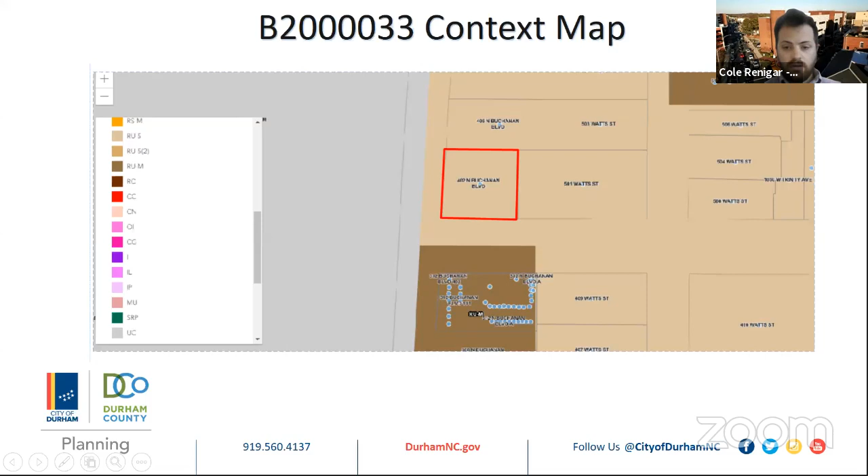Case B20, sorry, hold on a second. Case B2000033 are multiple requests for variances from the project boundary buffer requirements on the north and east sides of the parcel. The subject is located at 402 North Buchanan Boulevard. I'm sorry. The case area is highlighted in red. The site is in the urban tier, zoned residential RU5, and is within the city of Durham's jurisdiction.

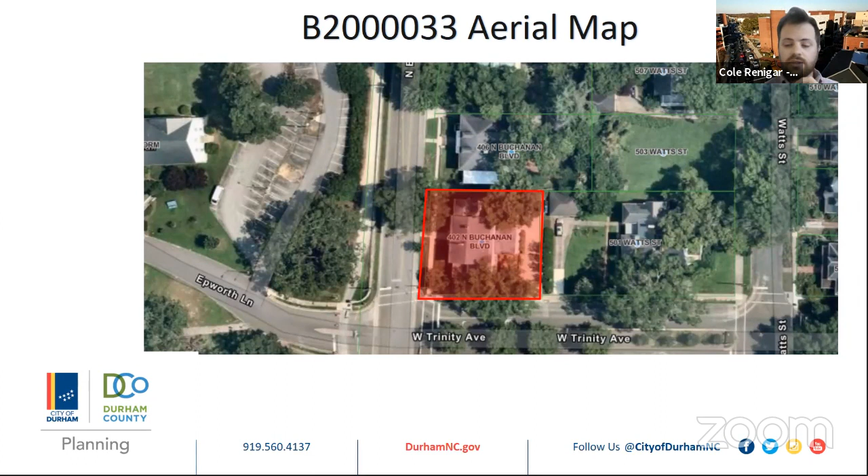The existing use is a church. Hold on 1 second, I'm sorry. Per Unified Development Ordinance UDO Section 9.4.3D, existing major specimen trees located within a required project boundary buffer shall be surveyed and protected as described in UDO Sections 8.3.5, tree protection and tree coverage, and 9.3.2, existing trees. Removal of such trees is allowed only as required to provide access to the property.

The applicant is proposing the removal of several specimen trees to make room for the new additions to the rear, the second story deck proposed to the south of the building, the new proposed driveway, and new proposed grotto. The grotto and driveway are located where the old driveway was. There is currently no project boundary buffer along the north or east side of the property.

UDO Section 9.4.3B requires a 30-foot wide 0.6 opacity buffer between residential and non-residential uses, and it should be provided. UDO Section 9.4.5.1E states that in no case shall the minimum width buffer be less than half the required width. In this situation, it would be 15 feet. The applicant is proposing a variable width buffer on the east side, ranging from a minimum of 2 feet 9 inches to a maximum of 6 feet 6 inches.

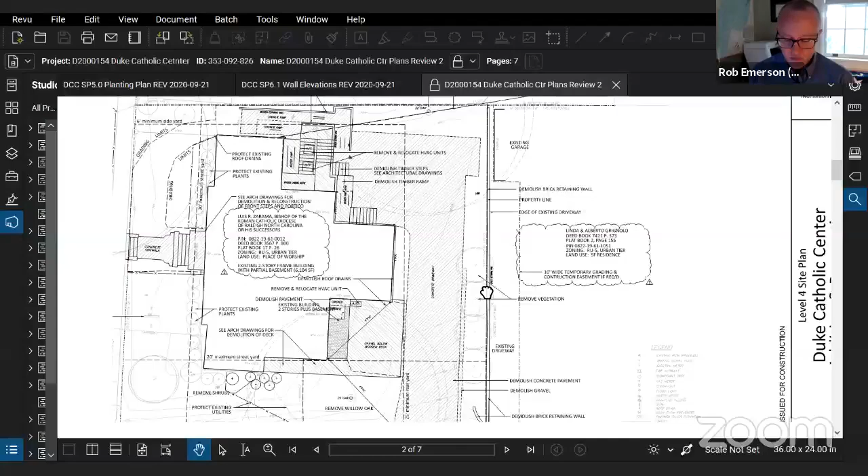Just to give you sort of a high-level overview, this project involves an existing structure that is at the northeast corner of North Buchanan and West Trinity Avenue. So we're directly across from East Campus. This building was built as a guest house for Trinity College in 1909 and was then adapted for institutional use in 1965 before being purchased from Duke by the Raleigh Diocese in 2002 for use as their student center. They did get a minor special use permit in 2002, and they have operated on this site since that time.

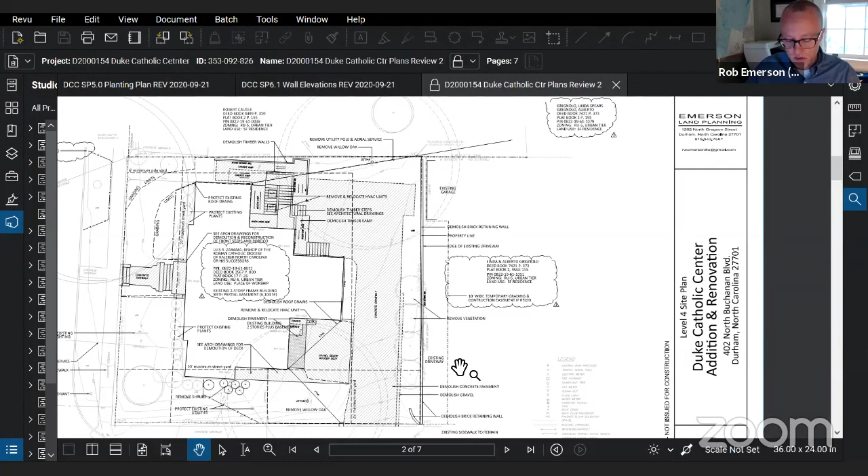What we are proposing is a one-story addition over a walkout basement on the northeast corner of the building. The addition will extend the planes of the north and east walls to a 90-degree corner. So not getting closer to the property lines than the existing building already is. We're not intruding on any required yards. We're not increasing the height of the building. The footprint of this addition is only 750 square feet, but because there's a finished basement below it, we're pushed over the 20% expansion threshold allowed by the current use permit. I understand we're talking about the variance first, but I just wanted to give you that sort of overarching view.

So our project has three primary purposes. The first one is to provide additional study space so that students can spread out through the facility. Second purpose is to expand the chapel, and in doing so, reconfigure some interior spaces that don't work very well, office spaces, bathrooms, et cetera, storage areas.

Probably the most important improvement that we're going to make is an accessibility improvement. This is an old house. There are steps that come up to the front door. There's not really much accessible about it. What we're proposing is to lower the grade behind the building approximately 30 inches. It varies from 2 feet to 30 inches. And then we'll provide a new van accessible parking space behind the building with direct access to the basement level, where we'll build a new elevator to serve all the floors. And then additionally, there would be accessible bathroom upgrades made inside.

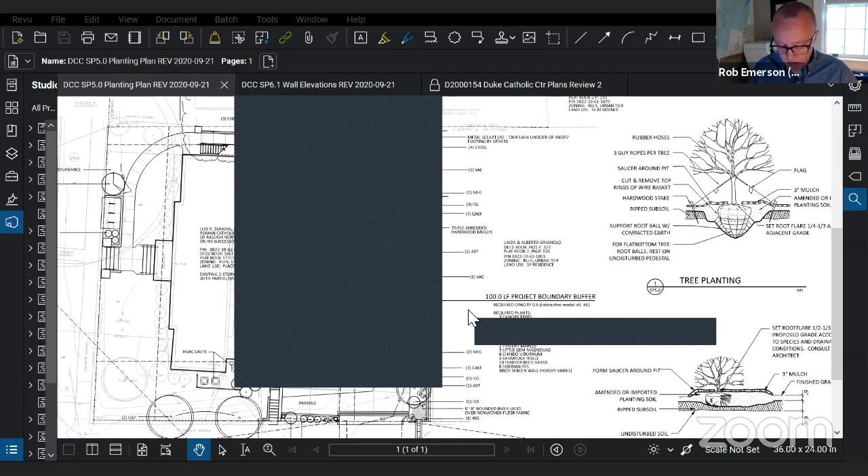We simply don't have the space to provide these buffers. These are existing homes that are more than 100 years old. They're close to each other. They're close to the property lines. The existing building is less than 10 feet from the north property line. And then additionally, there's a 32-inch diameter willow oak in the buffer. It's very close to the house. And it's simply not feasible for us to undertake the project without compromising the root zone of that tree.

So this is a unique urban condition in a historic neighborhood. It's directly across the street from East Campus. We didn't feel that suburban landscape buffers are appropriate here, and they're not possible. The house, as I said, is less than 10 feet from the north property line, and the existing driveway is less than 3 feet from the east property line. So we're certainly improving the condition versus what's out there now, although we are obviously adding on to the northeast corner of the building.

We have worked with our most immediately affected neighbors. The house to the east sits about 70 feet east of the property line. It's a huge lot. So I wouldn't say she is as directly affected as our neighbor to the north, whose house is, I believe, less than 10 feet from the property line, probably closer to 6 or 7 feet from the property line.

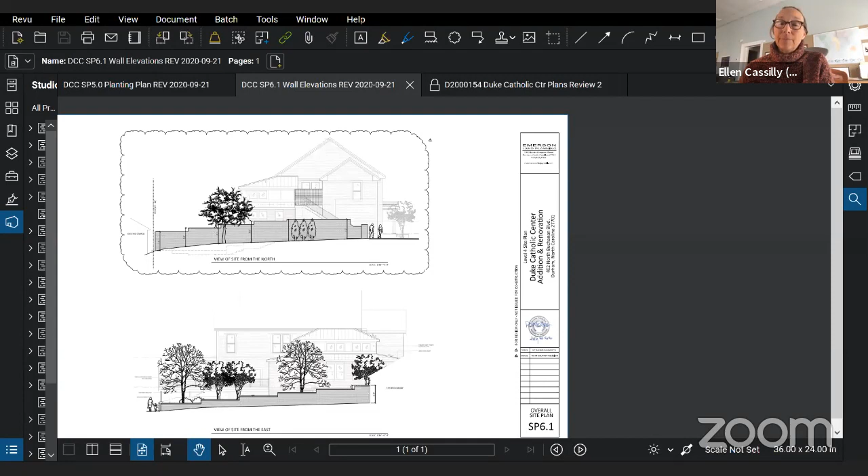Mr. Chairman, I have a question about sight lines on the east end of the property. How tall is the barrier fence wall going to be with respect to the driveway for sight line distance? Because there's a driveway right next to it, and is that going to be tall all the way to the sidewalk? I think the elevation shows it best.

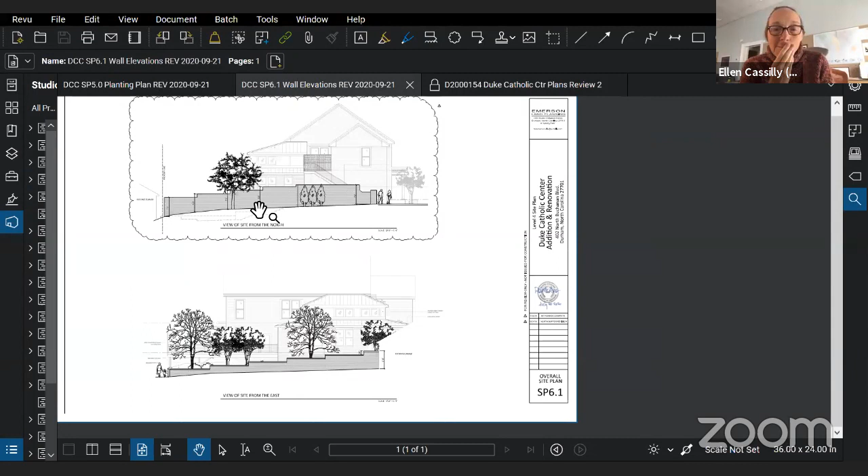Can you show me? Yeah, bottom. The people, with the little kid walking, so it'll be 3 feet high there? Yeah, that's about right. Thanks so much, Ellen. Thank you. No other questions. All right. Thank you, Mr. Lacy. Any other questions for the applicant?

Mr. Meadows, I have a question or two. The first one is, I wanted to be sure that I understood. This is an existing basement. The basement is there. There's no grading necessary for the basement. Is that accurate? Go ahead, Ellen. There is an existing basement, and one has to go down a few steps to get into the basement presently. I see.

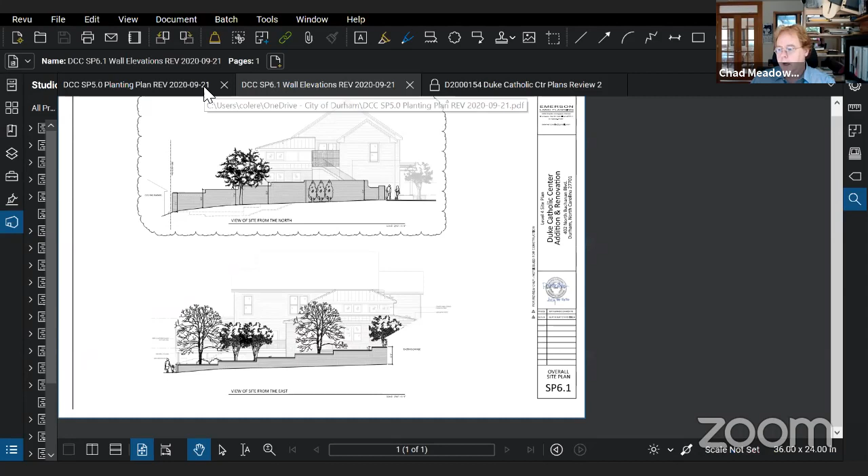So the plan is then to apply some fill so that that's an accessible access way to the elevator. Well, I wouldn't use the word fill. We're taking earth away to lower the grade to get down to the existing grade. Understood. Okay. And that grading is taking place in the location of the accessible parking space and the entrance to the elevator, and so forth. Is that right? Yes, we're lowering it obviously at the door, but to get there with proper slopes, everything needs to go down. Rob, you want to add on to that?

Yes, so the low point of our site is the southeast corner, so the bottom right-hand corner. And I guess it's frustrating not being able to point at anything. So you see where the van accessible space is? I do, yes. Just immediately north of there is where the elevator is inside the building. Is that correct, Ellen? Yes, right there. Okay. And a little bit further north, there's a door. Yeah. So to the right.

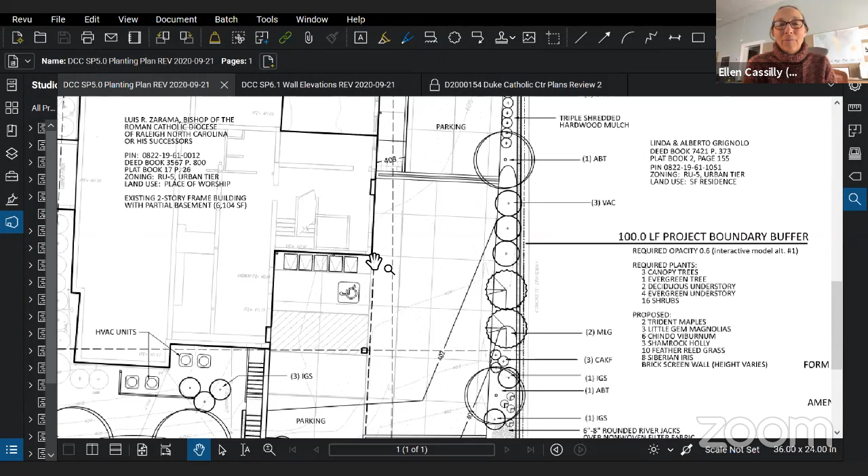To the right. There's a little notch in the back wall of the building, and that's where the door is, right there. Understood. Could you elaborate a little bit on the reasons why the 32-inch willow oak that's a specimen tree at the back, at the north lot line, how the grading in the southern portion of the lot is necessary, or how that would affect the 32-inch oak on the north property line?

Okay, so the L-shaped building addition, which forms the northeast corner of the building, will also have a basement under it. So there's a great deal of excavation happening in that part of the site for the building addition itself. And then north of there, we're bringing pedestrian circulation around the north side of the building. We're adding some bike parking out in front, and we want folks to be able to walk around the north side of the building and come to the back.

So there's a lot of work going on up there, and in the vicinity of the building addition, not only the basement addition, but the site work adjacent to it is all in a cut situation. We're matching grades essentially at the northwest corner of the building, and then we start digging our way down along the north side. So really because the northeast corner of the site is kind of the high point in the back half of the site, that's where we're doing most of the excavation.

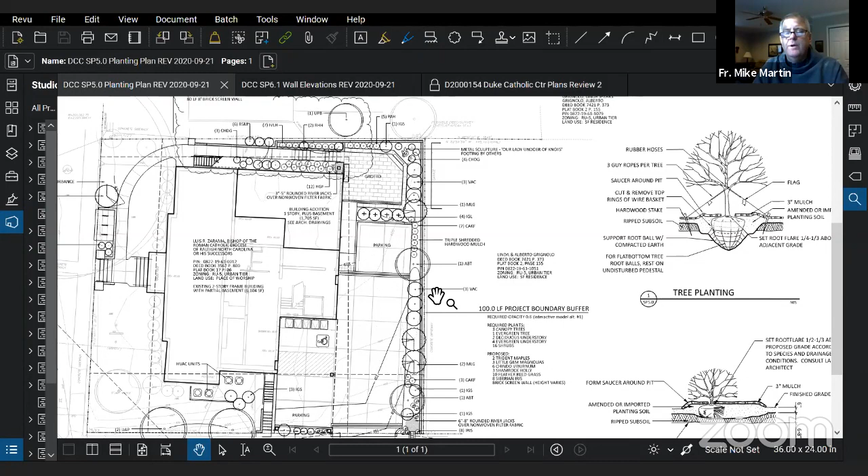So it has to come down to the rest of the grade as well. So even if we put the addition on without disturbing the root ball, which I think would be hard, and the grotto would stay at the same current elevation, then it would be in a corner of the property that we'd have to reach with either stairs or a massive ramp, so that's where we run into some problems with accessibility as well. And we do have a small ramp just to raise it up a little bit. Right, exactly.

No more questions. Thank you. Any other questions for the applicant?

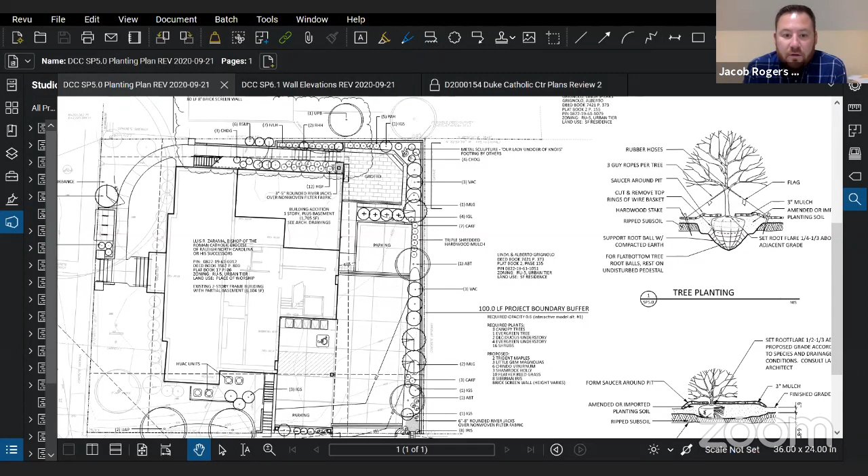All right. Cole, will you stop sharing the screen so I can see folks? Thank you. All right, well then let's have some discussion then, if there's no questions. Thoughts on this application? DeLacy? Hold on. First of all, I've got to make sure there is no opposition. Is there any opposition to this?

Mr. Rogers, I would like to speak in favor of the proposal. Go ahead. Good morning. I'm Gordon Caudle. Thank you for the opportunity to speak to you this morning. I live at 406 North Buchanan Boulevard, which shares the northern property line of 402 North Buchanan. I've been the owner of this property since 2001. I am in support of the revised changes that have been submitted, I guess, yesterday.

The applicants and their landscape architects have been very accommodating in creating what I think we will both agree is a suitable barrier between our properties, and also agreeing to replace the specimen tree that is going to be taken down and putting a specimen tree on my property. It's too bad to take down that tree, but I certainly understand the design difficulties, and it would probably die, I think, anyway. So looking forward to a new tree coming in.

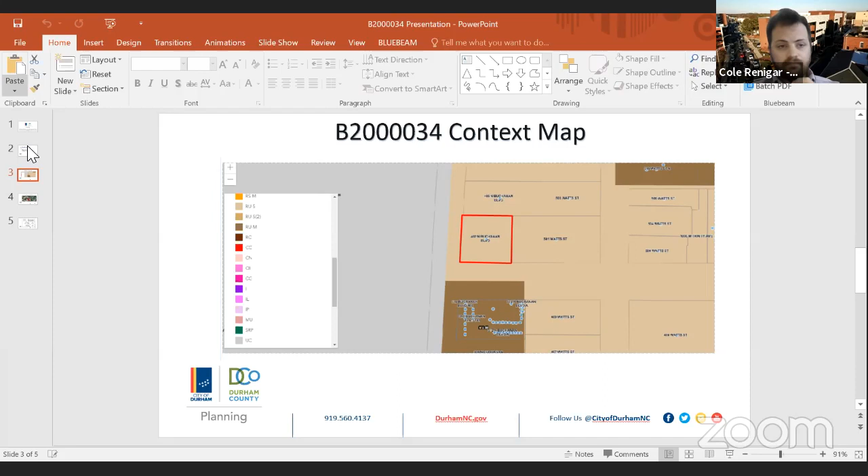Sorry. The case area is highlighted in red, and the zoning district is RU-5(2). The existing use is a church and can be seen here. The applicant, on behalf of the property owner, the Roman Catholic Diocese of Raleigh, proposes a 1,700 square foot, one-story on basement rear addition to the building located at 402 North Buchanan Boulevard. This project is on a 0.24 acre site that is currently used as a place of worship.

An expansion of more than 20% of what was originally approved for the MSUP, allowing a place of worship in a residential zoning district, shall require a new MSUP for the expansion per Unified Development Ordinance Section 5.3.3J1. A site plan case, D20-00154, is currently under review for this project and is included as an attachment to the application. See attachment 4, site plan.

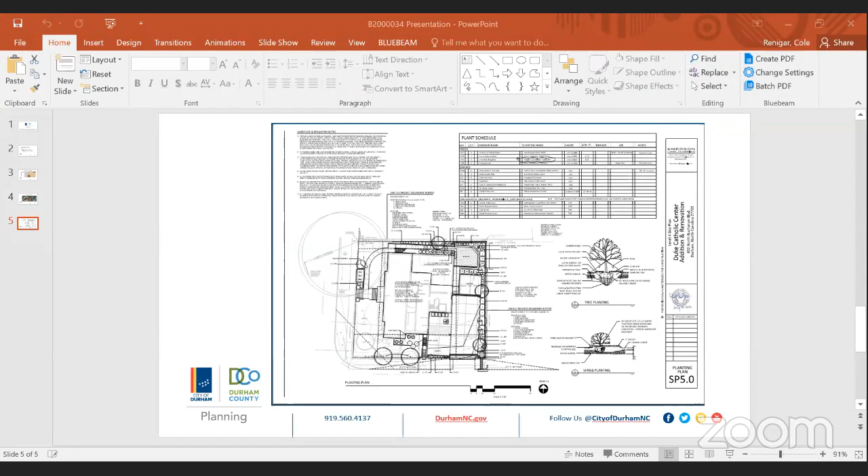All right. Susan, did you clarify the seating for this case? Yes. Okay. I just saw that Ian has joined us. Mr. Kipp. Okay. Yes. Okay, just make sure. Do you want me to verify that again? Yeah, I don't remember it. Yes. So the seating for this case is Mr. Kipp, Ms. DeLacy, Mr. Meadows, Mr. Rogers, Mr. Retchless, Ms. Wymore, and Ms. Jeter. Thank you. All right.

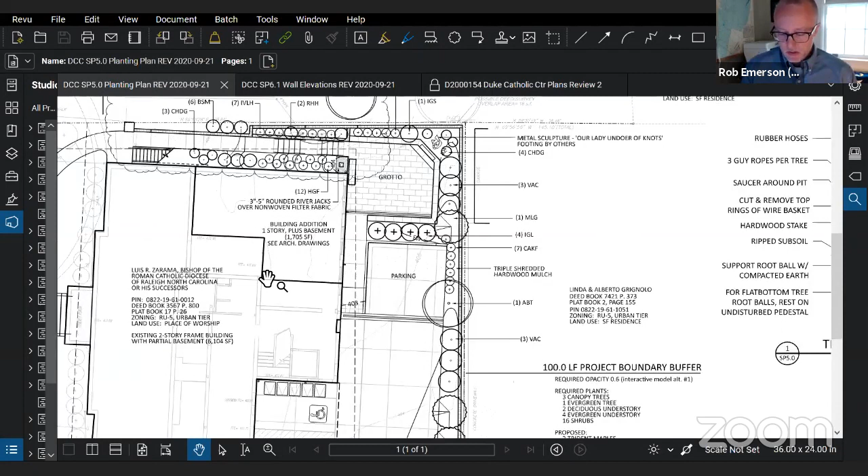Would the applicant come forward again? Hello, I'm still here. Rob Emerson with Emerson Land Planning. Again, I would ask, as Cole did, that the staff report and all our materials are made part of the public record. Thank you, sir.

Again, we're here. This is not a new use. This is a use that's occupied this site since the special use permit was originally granted in December of 2002. We've occupied this site for almost 20 years without any known problems with our neighbors. The proposed addition is just one story over a basement with a footprint of only 750 square feet. So although the floor area is being expanded by 29%, putting us over that magical 20% threshold, half of that new floor area is in the basement.

The addition is located to the rear of the building and is defined by extending the planes of the existing north and east walls to a 90-degree corner. So the addition is not any closer to the property lines than the existing building. It will not encroach on any required yards and will not increase the building height.

Traffic impacts of this addition are minimal, mostly because of the nature of who's using this facility. These are students, so they're walking from East Campus or they're taking transit to East Campus and walking to the site largely. Our parking requirement is driven by the size of the small chapel that's in the building. And part of the interior renovations involves increasing that chapel. So we're now required to provide 10 off-street parking spaces.

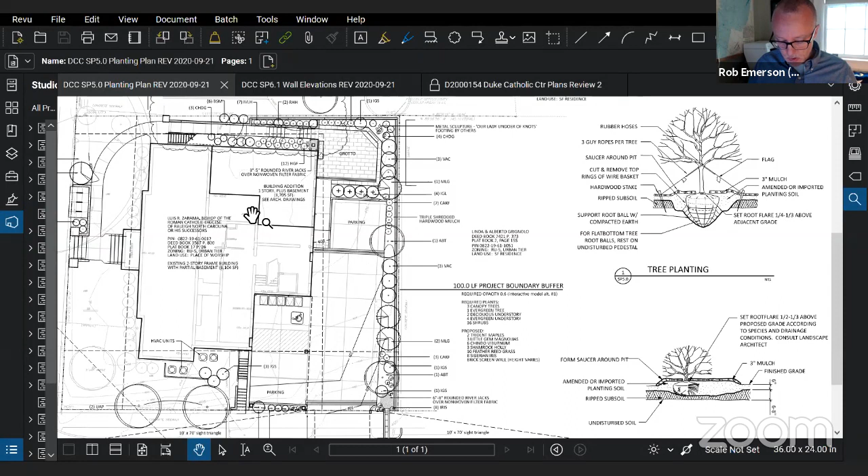We're providing 5 of those on site, including our van accessible space. And the other 5 are borrowed from Duke. We have an agreement with Duke University for 5 spaces across Buchanan Boulevard near the Epworth building. I think that's all I have. I won't read the findings to you, but I am happy to address any questions or concerns that you may have. Any questions for Mr. Emerson?

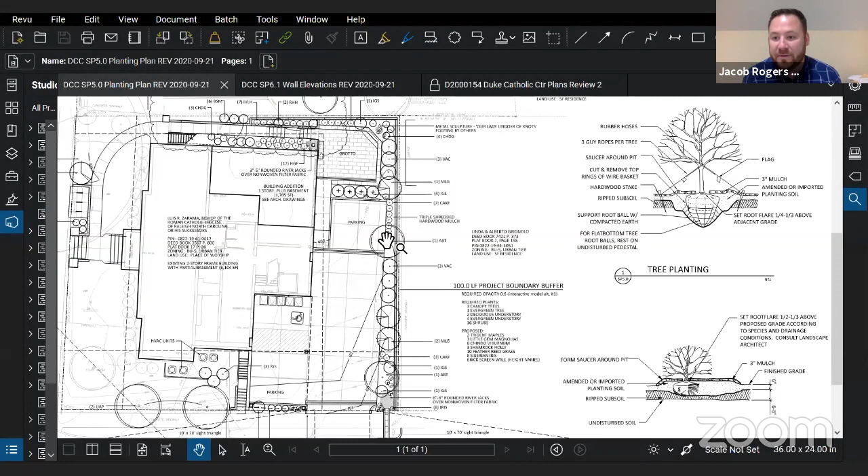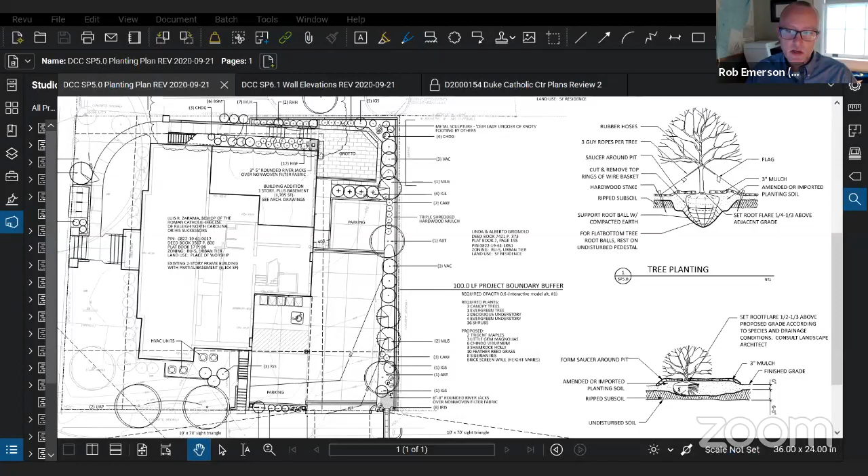Sure. I don't foresee an increase in students. It will just be that they're not on top of one another. That's the real issue, is that the same number of students are pretty much going to be coming and accessing the, I could show you pictures of when we're in our current chapel. I don't know if you know anything about Catholic Mass, but for communion, we have to have some of the students walk into another room just so we can get people moving around.

The other is the study that's going to be sort of the great room in the addition. Currently what students are doing is they set up plastic tables and chairs wherever they can find some space. And we just would like to create a more accommodating study space that will benefit them. So it's not going to increase traffic at all, but rather just allow for the students that are already there to have a space that's nice. And did you have any traffic study or anything for this? No, sir. Okay. Thank you.

Again, given that our students, most of them don't drive there. I mean, I would say maybe 1 or 2 might drive, like grad students from the neighborhood or something, but most of them just walk across the street from campus. And Cole, clarify for me that something like this doesn't trigger the need for any kind of TIA transportation. Based on the city code, we don't require any transportation analysis or impact analysis.

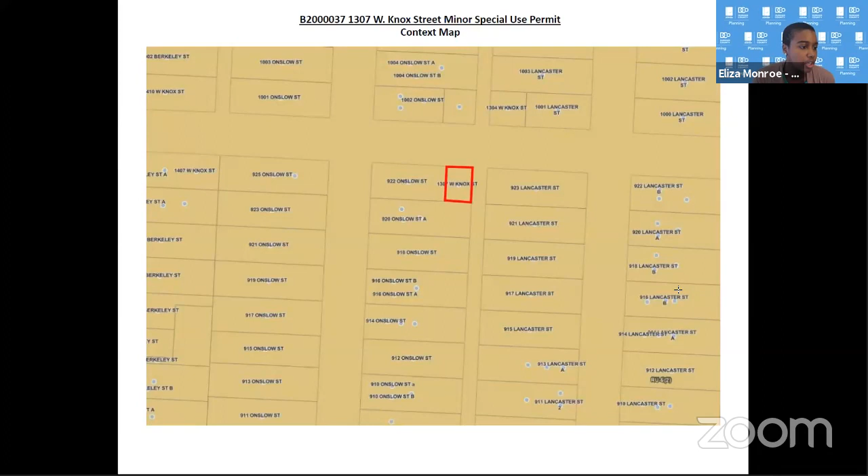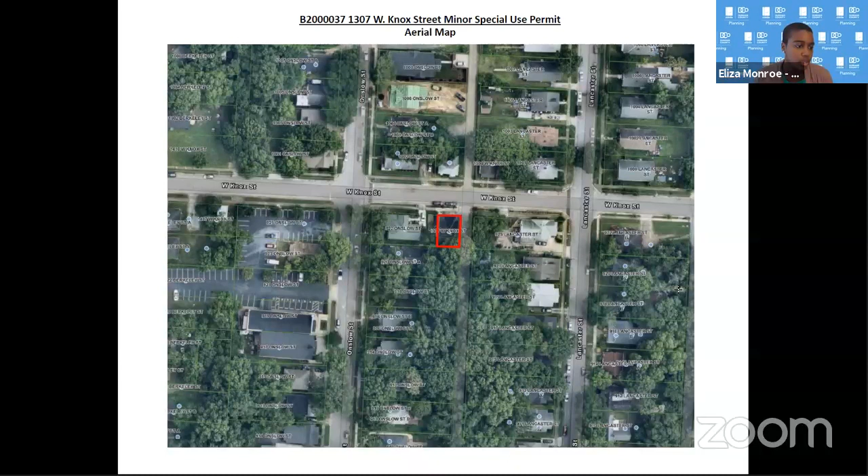The site is currently used as a commercial structure. It is a legal non-conforming structure. The use itself predates our code, so therefore the existing use is a legal non-conforming use as well as legal non-conforming structure. Per UDO section 14.4.1b.3d, additions to a non-conforming structure are permitted so long as the enlargement is a maximum increase of 10% of the existing square footage of the existing structure.

According to the submitted floor plan, which was the originally submitted floor plan, if you were able to look at the agenda in the past couple of days, it has been revised. So there are revised floor plans and elevations at the end of this presentation. But per the original submitted floor plan, the applicant was proposing a second-story single-family dwelling unit of a total of 1,457 square feet of floor area. This was an increase of over 55% of the original square footage, which requires the issuance of a minor special use permit pursuant to section 14.4.1b.

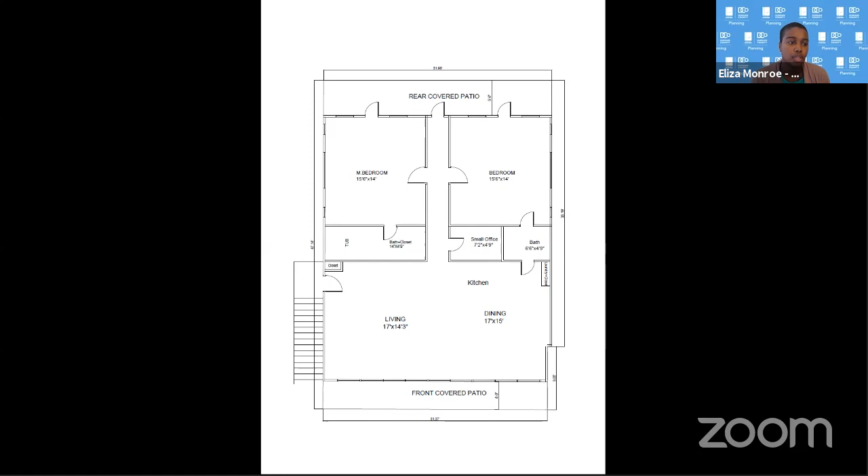Additionally, the scope of work includes a height increase of the original structure from 1 story to 2 stories, which will require a minor special use permit pursuant to UDO section 14.4.1b.3a1. The height increase does not qualify for an exemption as the proposed height is not consistent with or less than the existing height of the structure.

Lastly, given the property's location in the urban tier on a site less than 4 acres, it also must meet the infill development requirements in residential zoning districts per UDO section 6.8.1d.1. The new height of the structure, including the proposed construction per the original as well as the updated elevations, is 24 feet. The infill development standards state that the maximum height of the structure shall be the maximum height permitted within the zoning district or no more than 14 feet taller than the height of any adjacent structure, whichever is less.

Lastly, staff does want to note, and just to make sure I'm clarifying, I'll probably say it again because it might be confusing, the bottom floor is currently commercial. The applicant's proposing a single family dwelling on the 2nd floor. The height increase and square footage increase is what is triggering the minor special use permit that you all are hearing this morning.

Per UDO section 3.9.8a and b, there are 4 findings and 13 review factors that the applicant must meet in order for the board to grant a use permit. These findings and review factors are identified in the staff report, and the applicant's responses to the findings and review factors are identified in the application, both of which are within your packet, and staff will be available to answer any questions about this case this morning. Any questions for Eliza?

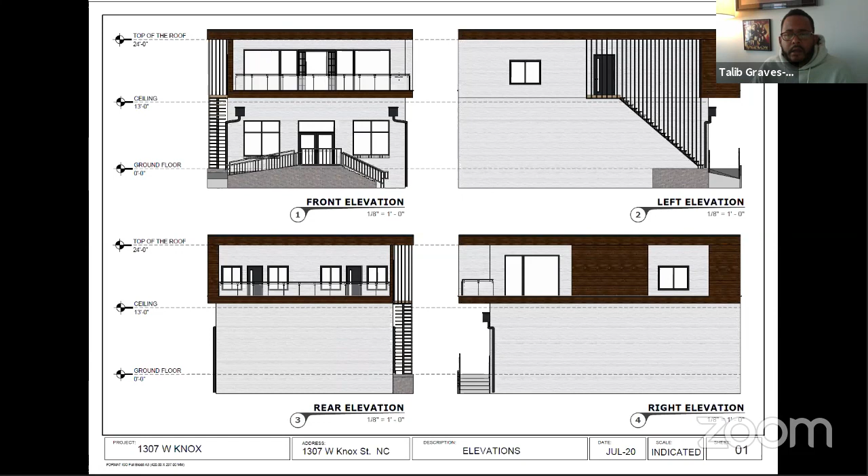Where we are now, I think to get my property to its highest and best use is to add a second story for residential dwelling. I want to be clear that the image on the screen is not the current rendering of the property. That rendering that we're looking at probably would not work. So I have updated it, and this one is the current rendering for the second story dwelling on 1307 West Knox Street.

Jackie Graves is on the call. She is a real estate broker. There were some questions about having to discuss effect on property values, and that's why Jackie Graves is on the call. Unless she is a licensed appraiser, we can't take testimony on values. Okay.

All right, Mr. Meadows, I think you have a question. Very quick, just one for the applicant, Mr. Chair, and that is: is this a separate living unit, or do you anticipate the people who would be working downstairs would reside upstairs? The plan is for it to be a separate dwelling. Thank you. Any other questions for the applicant? Staff has a clarifying question for the applicant.

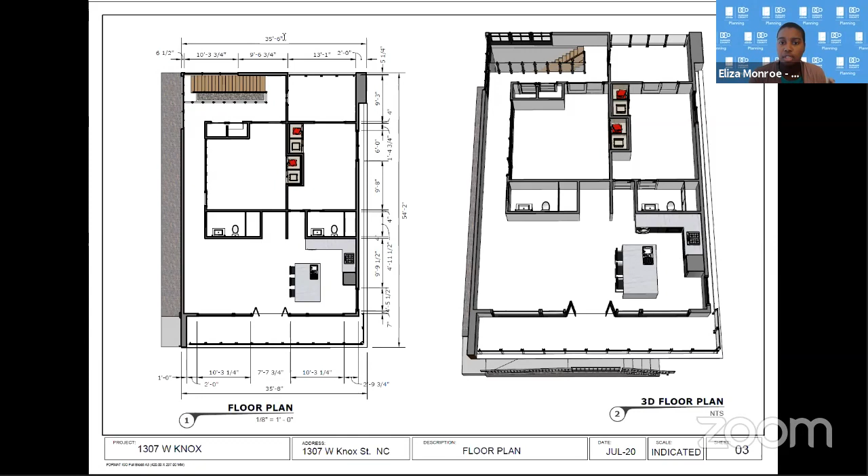So Mr. Talib, are there architectural drawings that are proposed? So this is the floor plan drawing. Are there any current architectural drawings? The ones that we have, are these no longer applicable? That is applicable, but the one that was the original, this one here? Yeah, the ones with the steps that you see on the left side of the building, that is no longer the architectural rendering. That should be deleted. We're looking at this one here. Correct.

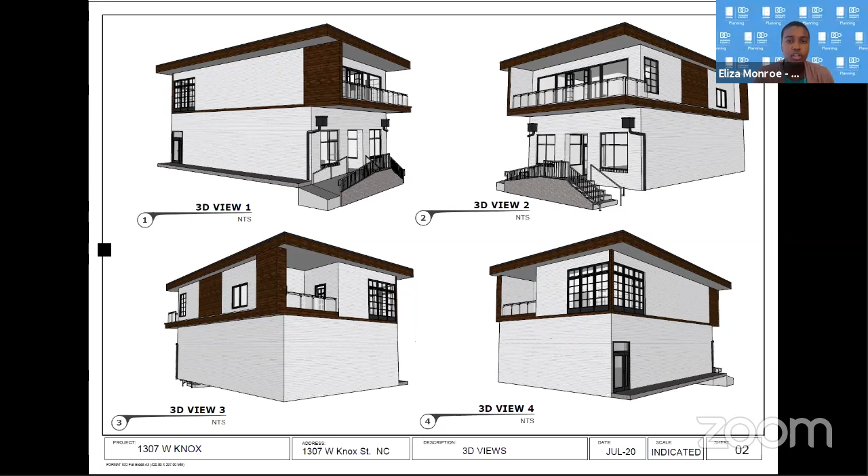Staff did have one follow-up question. Do you know the distance? It's not clearly shown here between the balcony and the property line. Do I know the precise measurements of the balcony and the property line? Yes, the distance. So the existing just has this bottom floor and this ramp, if I'm familiar. Yes, that's the existing. When you come out of the property now, there's an existing wheelchair accessible ramp and steps to get in the building. And it's approximately, I'd say, 48 inches wide.

The balcony? Yeah, they mirror each other in this design. So they're right on top of each other, essentially. Yes. And do you know that distance of the structure itself from the property line? I do not have that specific measurement.

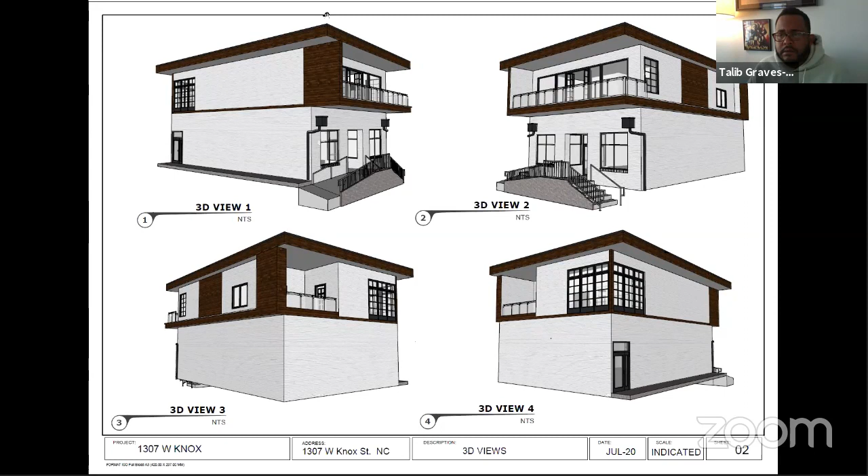Mr. Kipp had his hand raised. Mr. Kipp. Yes, just wanted to understand. So office uses are allowed here? Is this not a residential neighborhood? Eliza Monroe, staff speaking. That gets into that legal nonconformity. So the office use is a grandfathered legal nonconforming use that predates our code in 2006. There were recent renovations to the physical structure, but there was not a change of use. Therefore, they do not have to get a use permit for the office. Okay, but there will be building requirements for fire separation, et cetera, right? They will have to go through the building permit process if approved by the board.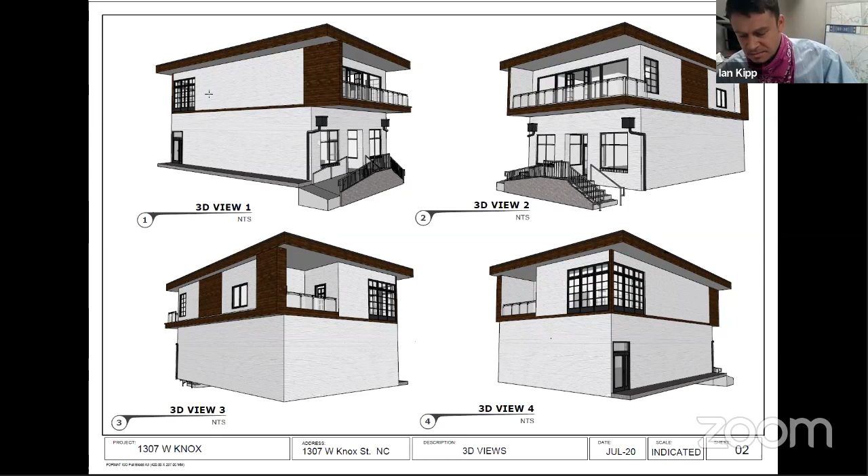Okay, another question. This lot is less than 0.05 of an acre. It seems quite small to try to have an office on. Does the UDO speak to minimum lot size? The code does have minimum lot sizes. To make sure I word this correctly, it's a legal non-conforming use and building. So the building itself does not meet our current code. It would not be able to be there if it was built post 2006 when the UDO was adopted, but it is considered a legal non-conforming structure since it predates that. So yes, the lot is smaller than what would standardly be approved, and if proposed today, this would not fly without a variance. Thank you.

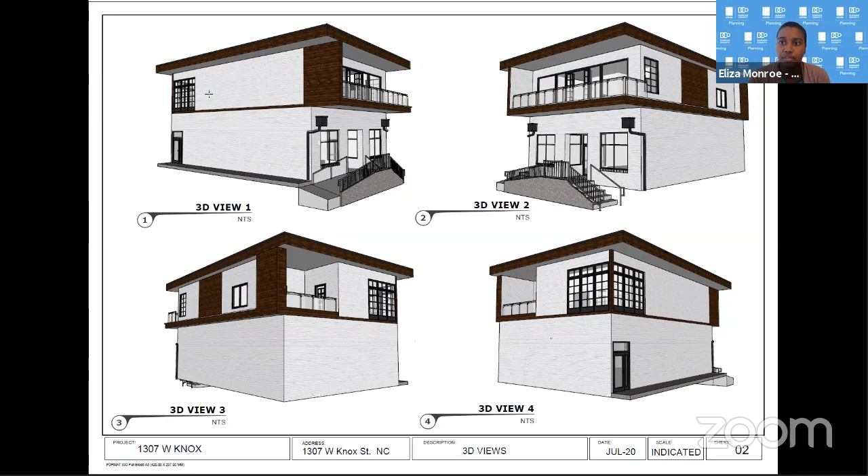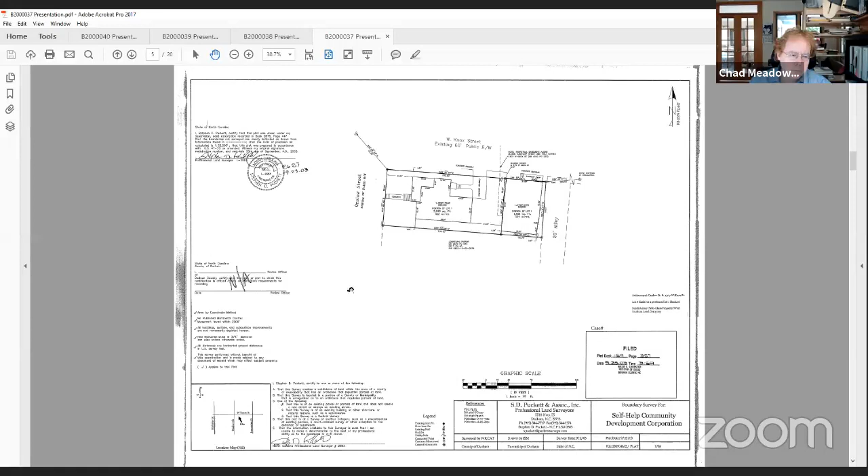Mr. Meadows. Eliza, could you scroll to the survey, please? Is it possible to zoom in? Yeah, I think that will show the distance between the driveway and the structure. I'm more interested in the handicap ramp, which appears to be outside of the lot line, but I'm not sure about that. I wonder if anyone has any thoughts about that.

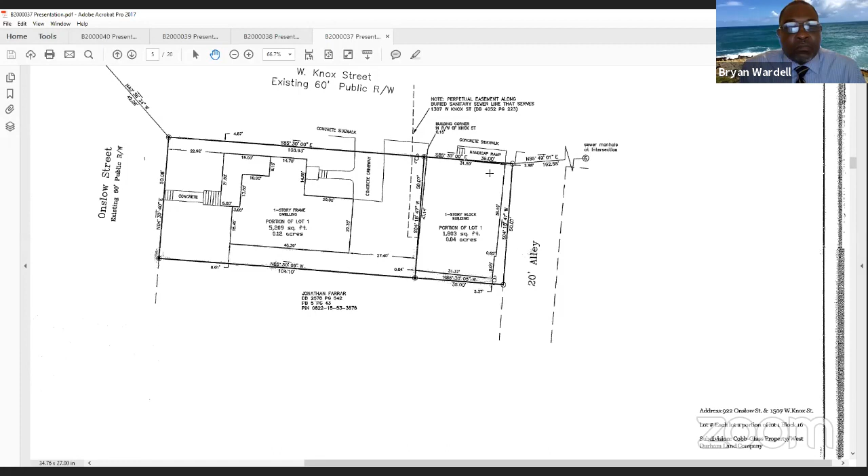Apparently not. So this is Jessica Dockery, staff. That would actually be an issue for the balcony to extend past the property line into the right of way. It sounds like that's more in line with the building permit process than ours. No, I believe I'd say so. It would be a safety issue for sure.

That would, at best, be another variance. If that would be allowable, since it's a second story, they could potentially get permission from Public Works for that. And we would have to discuss that with the applicant for that balcony. I'm a little confused. Is this a safety and building permit question or one for this variance meeting?

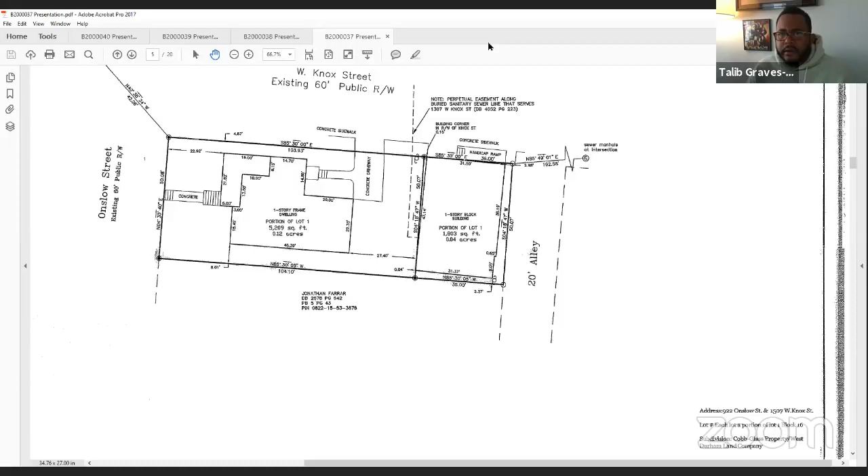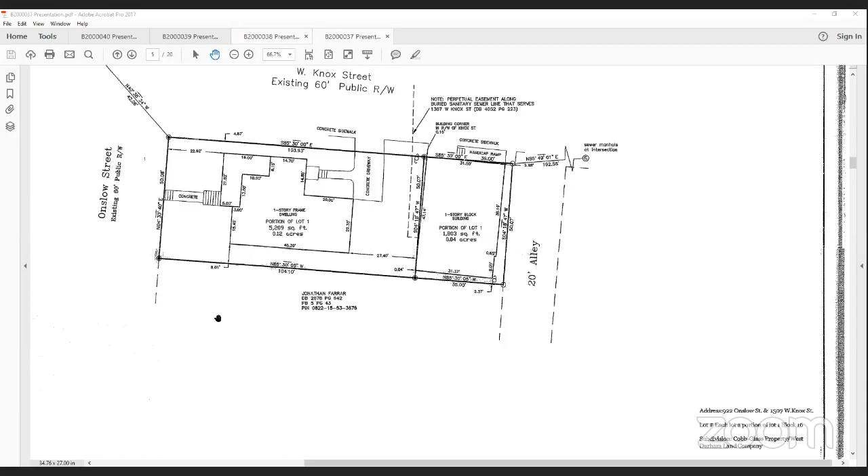So you're proposing a balcony that extends into the right of way, which would not be allowed under the Unified Development Ordinance as written. So if you did want that balcony to extend, you would need to work with staff and Public Works to see if an allowance for that could be made, most likely through a variance process, but not through the current application. Well said.

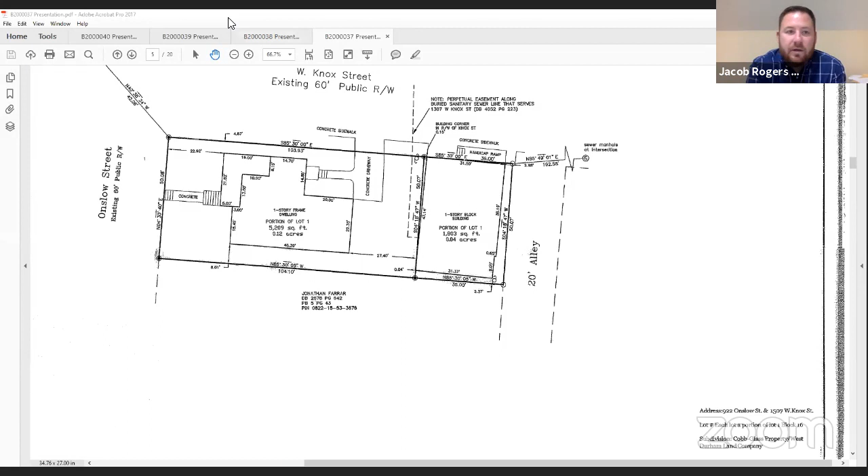All right. Any other questions for the applicant? All right. Eliza, would you mind to stop sharing so I can see everyone? Thank you. Any discussion, thoughts on this particular case for a minor special use permit? Are there any other questions in regards to the design? All right, Eliza, do you want to give us a recommendation?

Eliza Monroe with the planning department. I want to make sure before we move forward that we're taking the correct course of action. So I'm just requesting a couple of moments here while I consult. Take your time. Thank you.

I have just a general discussion question for the rest of the board. Is there any other precedent about the non-conforming residential business use in this neighborhood that we've heard? Well, I think we really need to take a look at this case on its own merits. I know, I'm just wondering if there's any other precedent that's been made for this type of use in this neighborhood. I just don't know that. I can tell you there's no other property like this in this neighborhood.

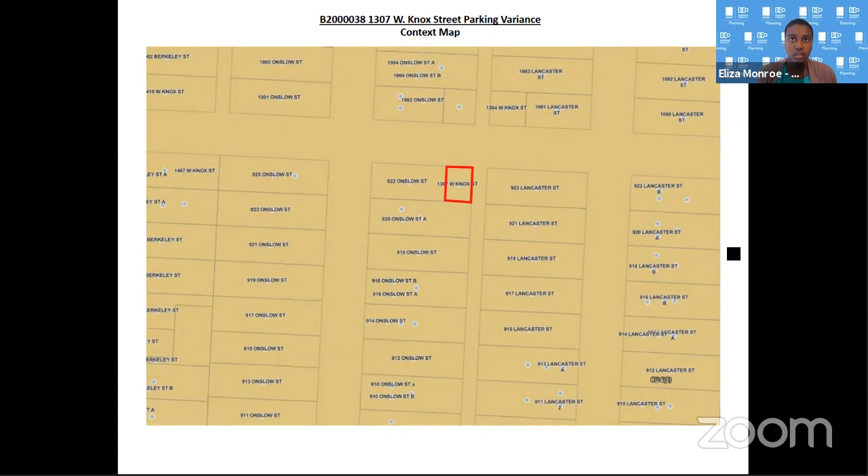Okay, good morning, Eliza Monroe representing the Planning Department. Planning staff requests that the staff report and all materials submitted at the public hearing be made part of the public record with any necessary corrections as noted. So noted. Thank you. Case B2000038 is a request for a variance from the parking requirements for a single family dwelling. The applicant and property owner is Talib Graves Mann, and the subject site is located at 1307 West Knox Street. The case area is highlighted in red. The site is zoned residential urban 5-2 and within the urban development tier. The site currently has a single story commercial building located on it.

Pursuant to the previous case B2000037, the applicant proposes to construct a single family dwelling unit on top of the existing office space. Pursuant to section 10.3.1 of the Unified Development Ordinance, all household living uses require 2 motor vehicle parking spaces per unit. The existing office located on the first floor is a legal non-conforming use that was established prior to the adoption of the ordinance and therefore does not currently meet the parking requirements and is not required to as a part of this proposal. This request is in relation to the second story single family dwelling that is going to go on top of that.

Per UDO section 10.3.1C.2, 1 required motor vehicle space shall be satisfied for every 23 continuous feet of street frontage for which there is adjacent permitted on-street parking. So in this case, the street frontage that the survey shows only allows for 1 parking space that meets the UDO standards. Credit for on-street parking shall only be counted towards one of the uses when you have any type of multi-use development. The applicant therefore is requesting a variance from the requirement to have the 2 motor vehicle spaces for a household living arrangement.

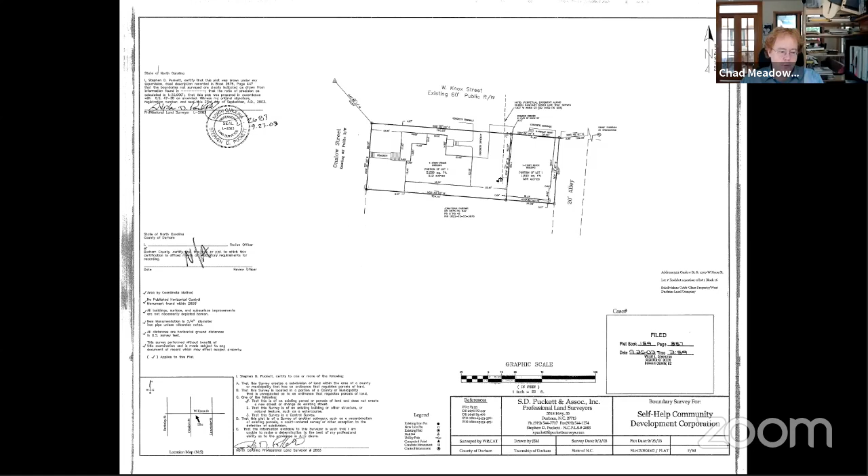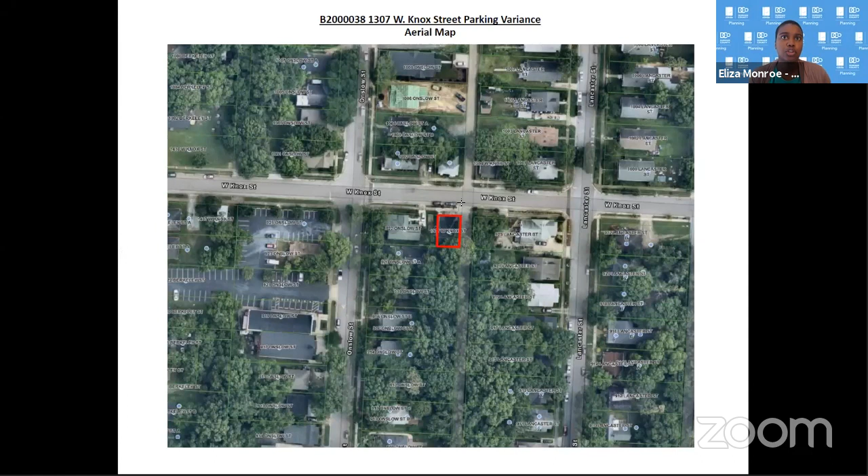Thank you, Eliza. Are there any sight distance triangles applicable for that alley that would interfere with on-street parking in front of the use? Yes and no. The existing building is already there, and the proposed structure would be a 2nd story. So the existing building survey does not show the sight distance triangle, but if it is located in the sight distance triangle, the current proposal previously approved with the last case would not create any additional encroachments.

And are there any no parking signs or anything like that in front of the building? Not that staff is aware of. I'll defer to the applicant here to see if there's any specific signage in front of the space, as he can probably provide more details. Thank you. There are not any no parking signs anywhere on Knox Street. All righty. Any other questions for Eliza? All righty. Mr. Talib, I'll let you take it over from here. Thank you so much, Eliza.

I'm required to have parking. I don't have much to say. There's plenty of parking there. 1307 West Knox Street is the only property that faces West Knox Street here. As someone who comes and works here every day, there's plenty of parking. There's never been an issue with any parking on the street.

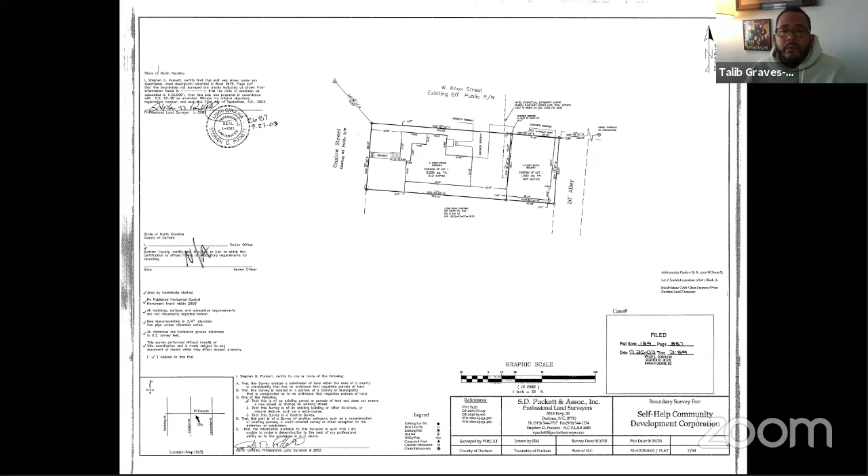I spoke to the Walltown Neighborhood Association, of which I'm a member. All of them supported it. We discussed parking on our call a week or two ago. They all expressed their support and said there's never been an issue with parking, and they don't think there would be one. That's really all I have.

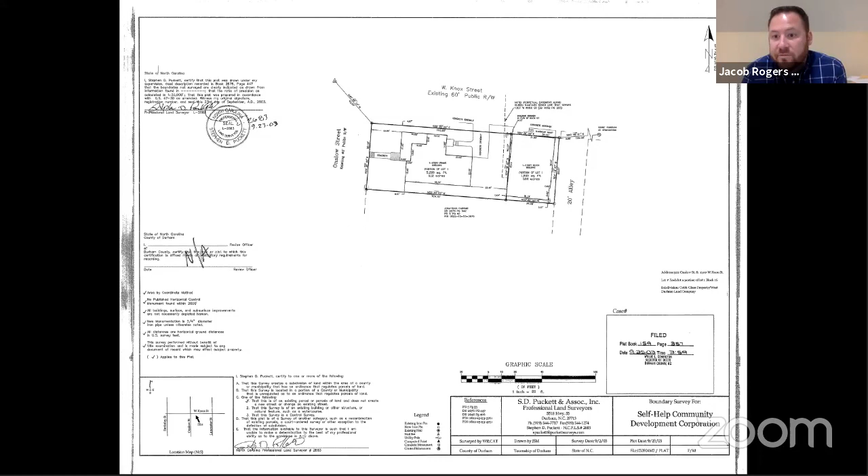So the association, unfortunately, we can't take the testimony unless they're here, but I do appreciate you reaching out and talking with them. Any questions for Mr. Talib? Raised hands. Mr. Retchless has his hand raised, and I'm going to stop share so we can see everyone, and I can pull this back up if it's needed. Perfect. Mr. Retchless. Yes.

Talib, do you have any more supporting evidence, like pictures or anything showing that there are no parking signs on that street, and any evidence supporting that there would not be complications from parking? Am I able to share my screen? I mean, I can just go on Google Maps and we can walk down the street. Or I can go outside and take a photo real quick and upload it. I'm not trying to be sarcastic.

I didn't take a photo of the street to prove that there's no parking street signs on this block of 1307 West Knox Street. I'm just trying to give you more, the burden of proof is on you to show us that there won't be a parking problem there. Staff, I'm pulling up Street View. If you all want to continue the discussion, but I am pulling up Street View at this time. I think Ms. DeLacy has a question as well.

I visited the subject site and I saw that there were no parking signs. There's a gravel driveway or alley to the left of the property as you face it, but there were no street signs saying anything other than stop at the corner. Okay. Thank you, Ms. DeLacy. There is a no parking, this is Meadows, there is a no parking sign in the alley beside the building. DeLacy, yes, but that's the driveway. It's the alley behind all of the houses so they can get to people's garages, but it's not on the street.

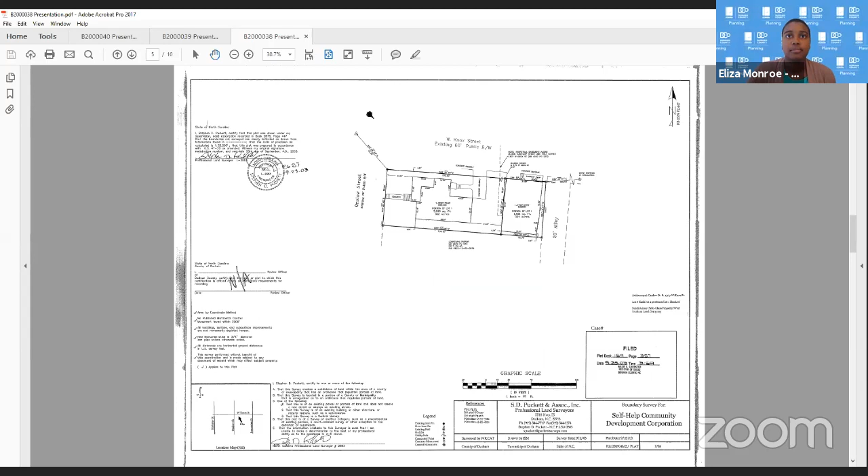And staff would like to chime in, Mr. Meadows, on your most recent point about there being adequate on-street parking. What can be credited for this specific address is what staff was denoting earlier. Because they only have 31 feet of street frontage, they can only technically be credited one space. Eliza, can you zoom in, please? Yes, I can. So this is the space. Please let me know if you need any further zoom as well, Ms. Jeter. That's great, thank you.

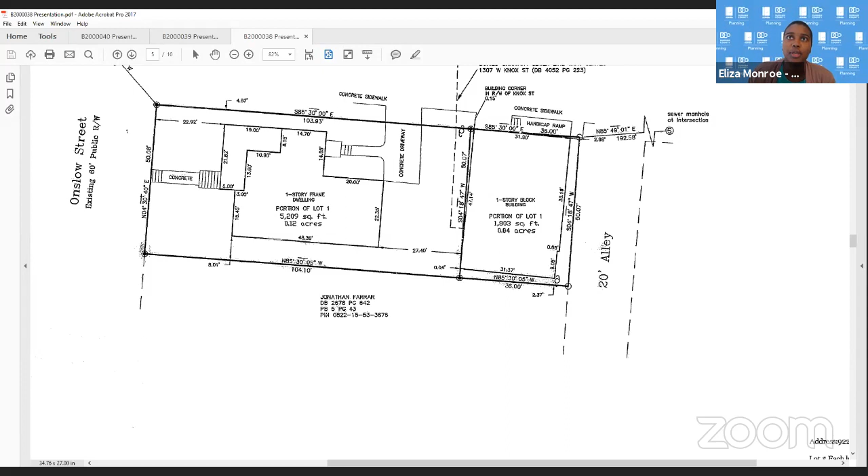Any other questions for the applicant? I'm going to stop sharing again, Mr. Chair, so you can see everybody. Thank you. All righty. Any thoughts? Anybody want to share anything about this particular case? All right, is there a motion?

I just want to be clear about something. So there's a deficiency of 3 parking spaces, is that how I understand this? Because 1 is credited. There is a deficiency of 1 parking space. The parking requirements that you are observing today are in relation to the single family dwelling unit that was approved with case B2000037. And a single family dwelling unit requires 2 parking spaces. If the applicant would like to use the 1 existing space as credit, then they have a shortage of 1. So just to clarify on the numbers in which use we're looking at.

Meadows. Mr. Meadows. I hereby make a motion that application number B2000037, an application for a minor special use permit on property located at 1307 West Knox Street, has successfully met the applicable requirements of the Unified Development Ordinance and is hereby granted subject to the following conditions: that the improvements shall be substantially consistent with all plans and information submitted to the board as part of the application. I think that's for the minor special use permit, isn't it? Yes, they're the same address.

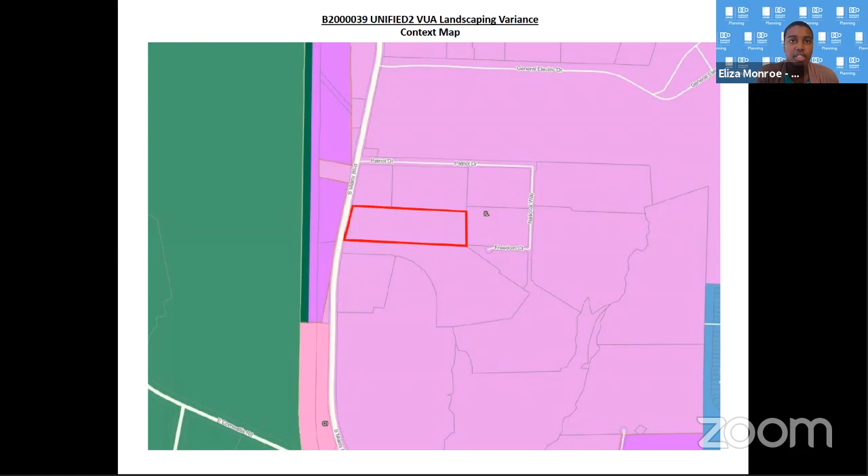Case B2000039 is a request for a variance from the vehicular use area landscaping requirements. The subject site is located at 3829 South Miami Boulevard and is zoned light industrial and in the Research Triangle Park North compact neighborhood development tier. The case area is highlighted on the screen in red. The site is currently being utilized by the property owner, which is Unified 2 Global Packaging Group.

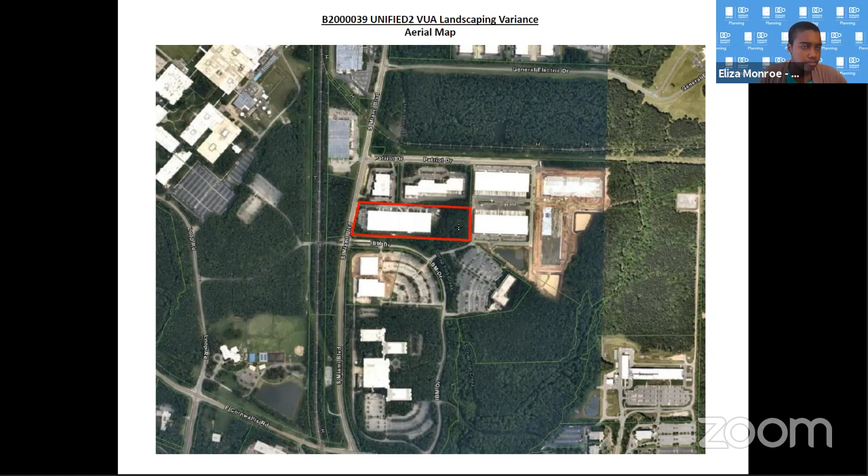There are some renovations that are taking place in the back portion here that staff is circling of the site. Per section 9.8.3D of the Unified Development Ordinance, trees shall be planted at a rate of one 2-inch canopy tree per 2,000 square feet of vehicular use area, and no canopy trees used for vehicular use area landscaping credits shall be planted farther than 10 feet from the edge of the VUA.

Within vehicle use area 2, which we're showing here on the screen, the applicant is required by the UDO to provide 13 canopy trees. The applicant is requesting a variance to provide only 3 canopy trees within that area instead of 13 due to the sanitary sewer easement that runs through this property.

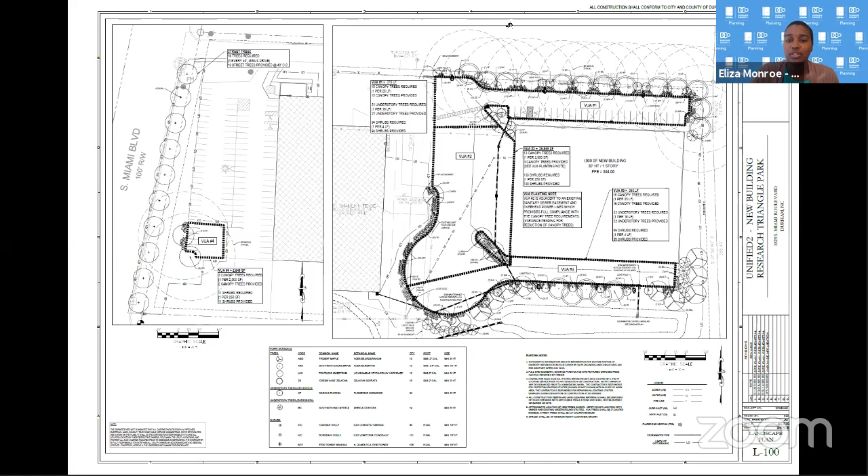UDO section 3.14.8 establishes 4 findings which the board must review in order to grant a variance. The staff report, analysis of those findings, as well as the applicant's responses to those findings in their application is available in the packet that you all received beforehand, and staff is available for any questions as needed throughout the hearing. And I understand that this is a pretty detailed sheet, so I'll go ahead and zoom in to the area and we'll go from there.

All right, any questions for Eliza before we continue? All right, Mr. Ferris, we'll turn it over to you. Yes, I'm the chief estimator for ACH Constructors. If this project is approved, we'll be building this addition. It's a 50,000 square foot addition behind the existing building. I've never done this before, so I'm filling in for our civil engineer. No worries. Just tell us what you want to do and why it's necessary.

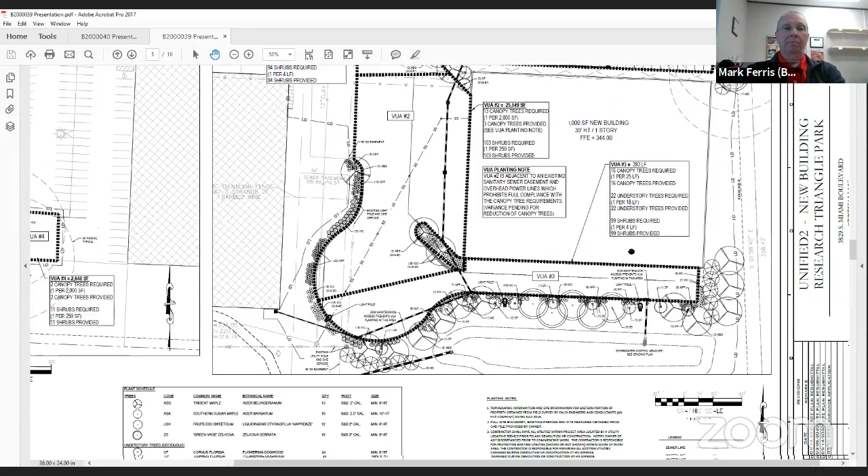Like I said, it's a 50,000 square foot warehouse. Parking for the people that work in it there on the top of the drawing. A turnaround area. There'll be loading docks along the left side of the new building. Seven loading docks. And we'll be providing as much landscaping as we can in the small area we have. All right. Are there any questions for Mr. Ferris?

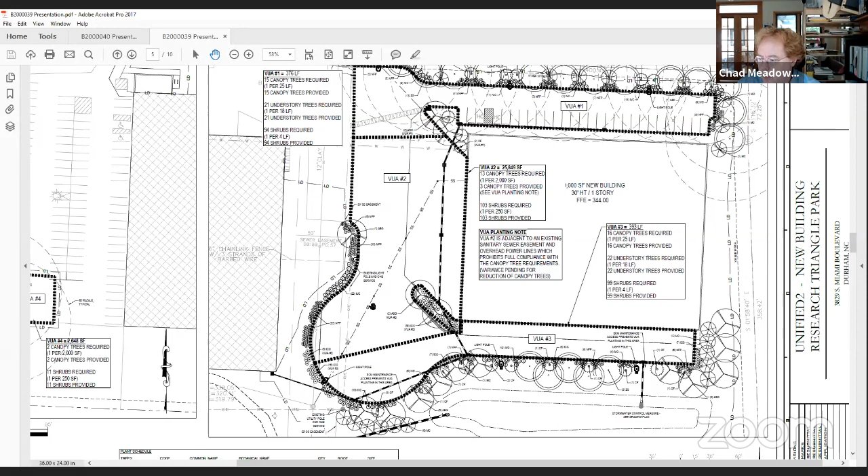This is Meadows. It may be a question for Mr. Ferris and it may be a question for staff. Is the sanitary sewer easement that appears to the left of, I guess the area of disturbance, I'm not sure what to call it, it's marked 50-foot sewer easement, is that where these 13 canopy trees would go?

Eliza Monroe, staff speaking. Am I unmuted? Yes, I am. Sorry. So this area here is vehicle use area 2, which staff is circling on the screen in front of you. Please let me know if you can't see my cursor and I'll try and use the highlight tool. So within this area, there is a sanitary sewer easement that runs through it, and the applicant is required by the Unified Development Ordinance to provide 13 canopy trees. Given the UDO's requirement and the location of the sewer easement, they cannot provide those.

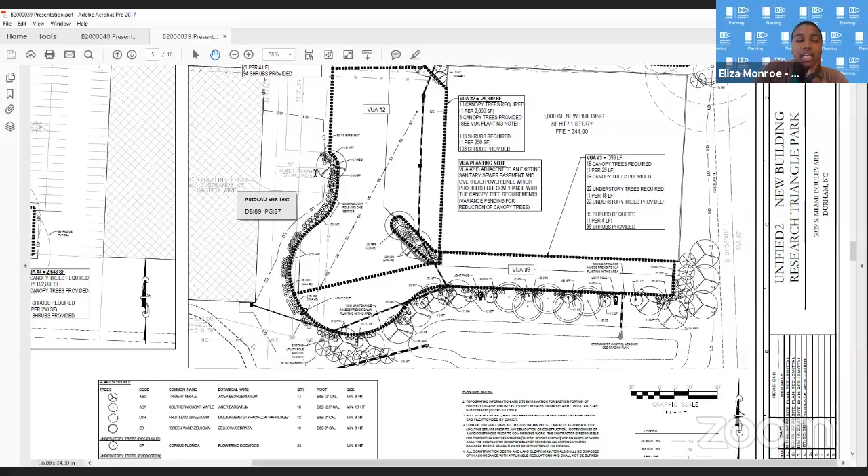Actually, I meant to mention something a little bit earlier. There is a section in the code which does allow provisions in which they can move trees throughout VUA areas, but unfortunately, there's no other place for them to relocate it due to the location of the sanitary sewer easement, and they're not permitted to construct within that easement per the Durham reference guide for development, which was linked in the staff report. So they can't put it there. Public Works will probably not be happy with them. Thank you, Eliza. Any other questions for Mr. Ferris or staff?

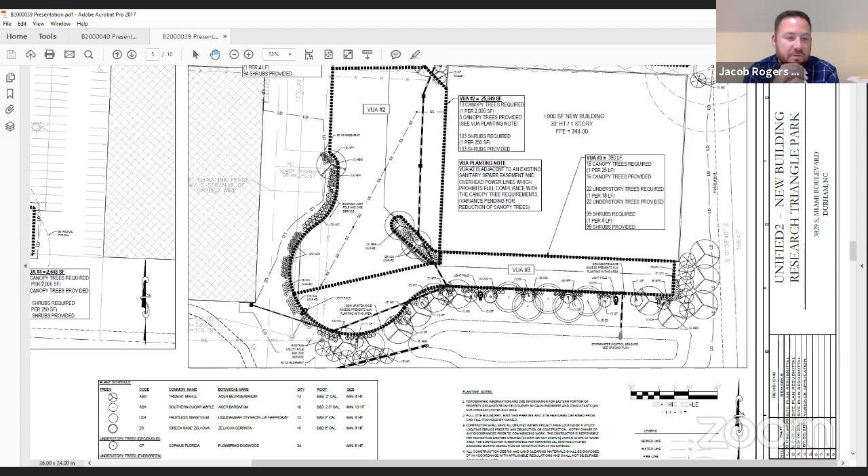Ms. DeLacy. You can't put trees on a sewer easement. I understand that, Eliza. Can bushes be planted without upsetting the sewer authority? Eliza Monroe, staff, the reference guide language states that no landscaping is allowed in existing and proposed sanitary sewer easements. The site plan is under review and Public Works has been a part of that review. So this variance request was triggered not just by Planning Department comments on that site plan, but also comments from the Public Works Department. Thank you, ma'am. Any other questions?

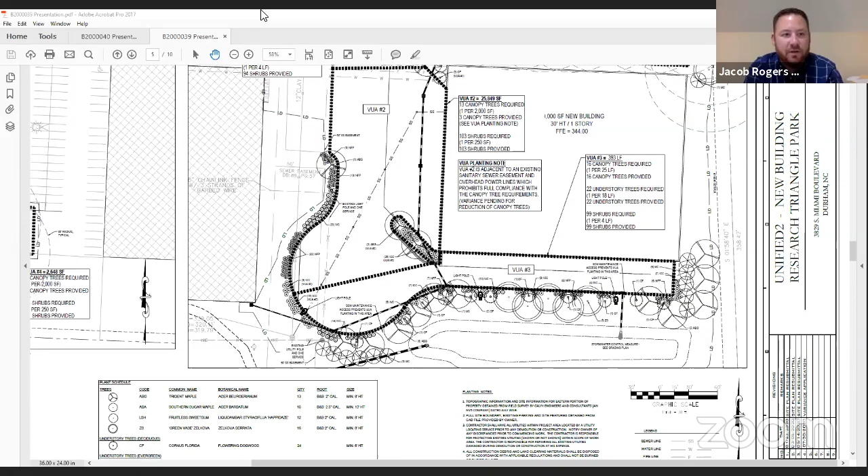All right. Eliza, will you unshare for a moment? Thank you. Any discussion on this particular case? Mr. Retchless. I have a question for Eliza. Were there also power lines that were keeping any other trees from being planted?

Eliza Monroe, staff here. So yes and no. Our landscape manual is pretty hefty. I'll have to give a shout out to the other staff members that are working on that. But there are options. So there are trees that are permitted to be planted underneath the power line. So that is not a factor needing to be addressed, as there are options for them to plant specific types of trees underneath the overhead power lines.

Thanks. All right, any others? Mr. Meadows? I'd like to hear a little bit more about how we're not able to plant any more trees on the site. I didn't hear any evidence about that. Mr. Ferris, you want to address that?

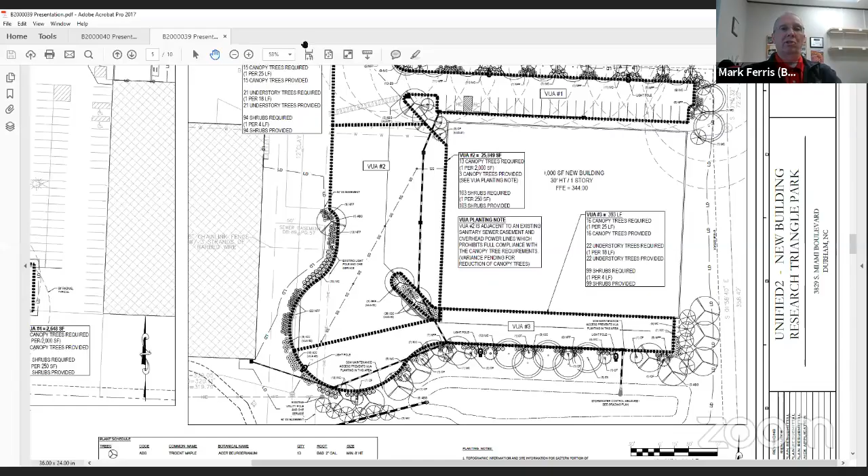Yeah, if somebody put the site plan back up on the screen, it's a very tight site, top to bottom. The existing building's there on the left in the hashed area, and it's a very long building. The parking lot that's in front of the building now along Miami Boulevard goes right up to the road almost. There are trees up there. Their property line and the driveway running down the left are almost right on top of each other, and there's nothing you can really do along that area.

The bottom of the existing building is a drainage swale, it looks like. And I guess it's the emergency fire exits for the people that could come out if they have to. There's some space over there. It's mainly a grassed area. It's a very steep hill going up to the property to the south. So it's pretty hard to get anything in that area. So pretty much the only area to work in is around this new building.

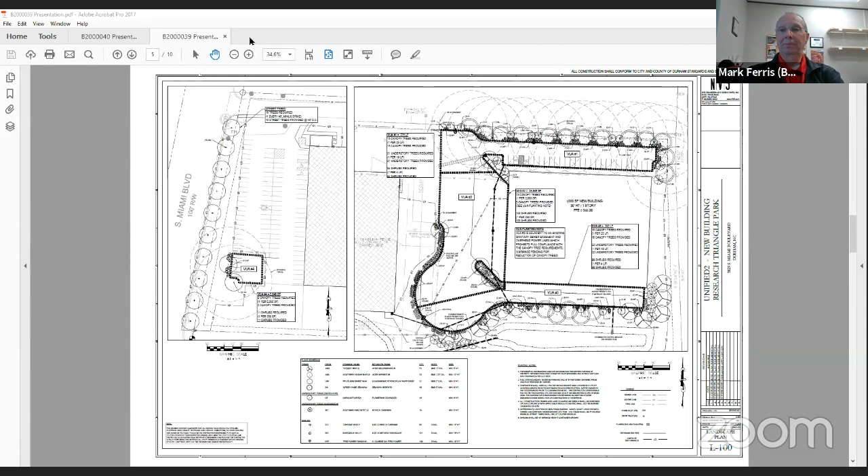And by the time you put the building, the back property line, the parking lot to the top, the truck turnaround to the left, we've used almost every bit of space that was allowed. We could probably sneak some more bushes in somewhere. Thank you. All right. Any other thoughts, questions? All right. Does anyone want to offer a motion?

Ms. DeLacy. I hereby make a motion that application number B2000039, an application for a request for a variance from the vehicular use area landscaping requirements on property located at 3829 South Miami Boulevard, has successfully met the applicable requirements of the Unified Development Ordinance and is hereby granted subject to the following conditions: that the improvements shall be substantially consistent with the plans and all information submitted to the board as part of the application. We've got a motion. Is there a second?

Mr. Retchless. Susan, turn it over to you. Mr. Rogers, yes. Ms. DeLacy, yes. Ms. Jeter, yes. Ms. Wymore, yes. Mr. Kipp, yes. Mr. Retchless, yes. Mr. Meadows, yes. Motion carries 7-0. By a vote of 7-0, your variance has been approved.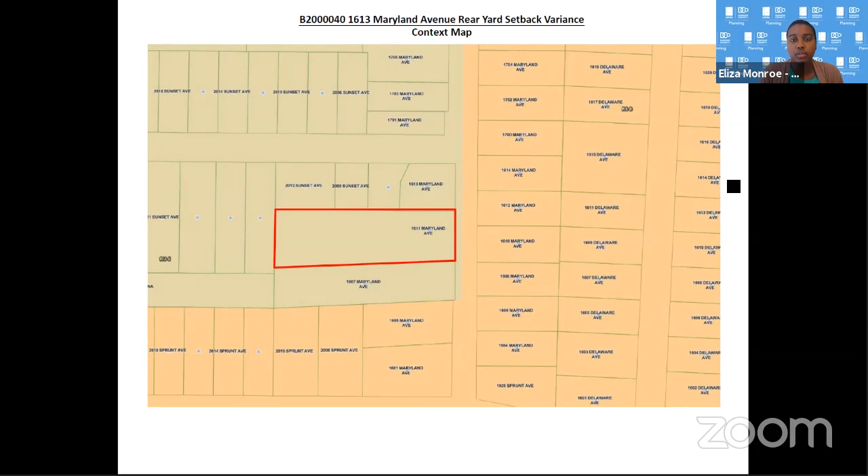Case B2000040 is a case for a variance from the rear yard setback requirements to construct a single family dwelling. The applicant and property owner is Robert E. Fields, and the subject site is located at 1613 Maryland Avenue. Once again, we're getting into that previous document that I mentioned earlier. So I'm gonna explain a little bit better by going 2 slides down. So currently the flag lot that is located to the back here, 1613 Maryland, is going to be vacant. The primary structure for the flag lot is going to be here in the front.

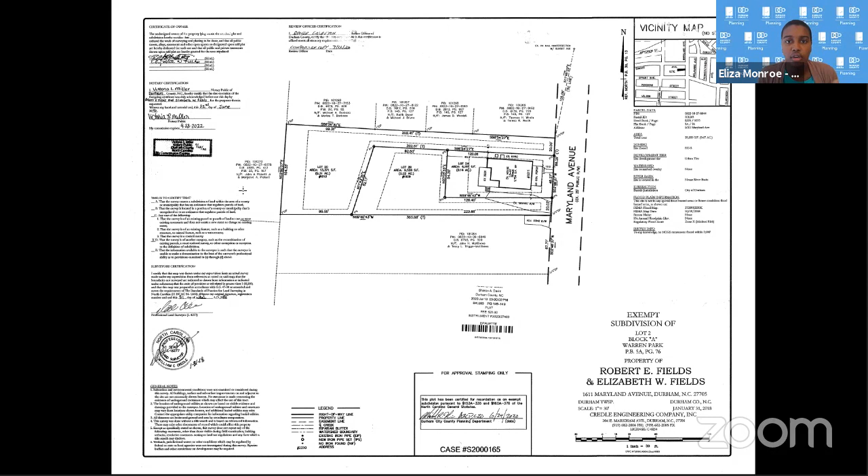Per UDO section 7.1.2b of the Unified Development Ordinance, a 25-foot rear yard setback is required for a detached single-family dwelling in the RU5 zoning district. The applicant is requesting a 19-foot variance from the rear yard setback, resulting in a 6-foot rear yard. This reduction is being requested as the applicant will be orienting the house in a manner in which the rear yard will become the functional side yard of the proposed future home. And the next slide shows what I'm referring to in relation to the request.

So what you have here, the original hatch, I apologize if you can't really see it very well, but the original hatching here shows what's required by the UDO on any given day in relation to the rear yard setback. The applicant, given the orientation and turning the house a little bit, is proposing a 6-foot rear yard. So this area here that staff is highlighting with the cursor is going to be the variance request and the proposal for a variation of 19 feet from the required 25 to the 6 feet that is being proposed here.

UDO section 3.14.8 establishes 4 findings which the board must make in granting a variance. The applicant's responses to these findings, as well as staff's analysis of these findings, are included in the staff report and their application also. And these were all part of the packet which you all received. Staff is available for any questions throughout this time. And if there's any confusion, please let me know, because I am aware that what was originally shown is not what you're seeing today. All right. Thank you, Eliza. Any questions for staff?

Mr. Lacy, your lips are moving, but you're muted. Okay. My lips are moving, but I'm not thinking. Okay.

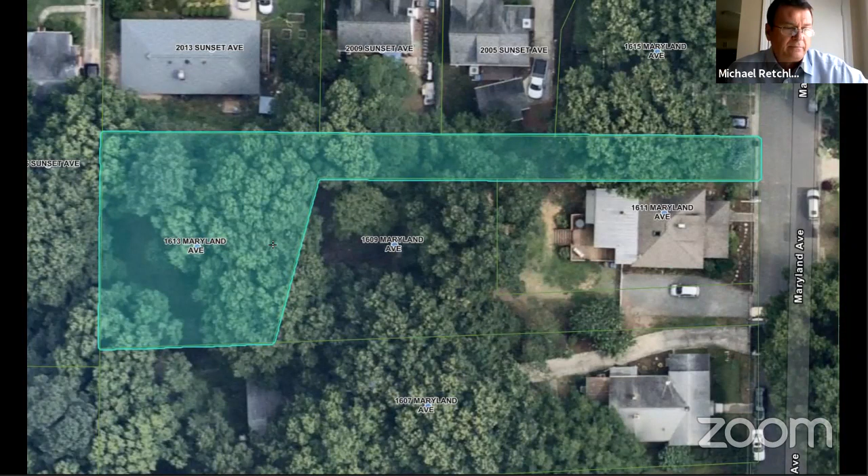Yeah, no. Eliza and our staff here. So the rear setback, even though they're orienting differently, the rear setback will always be the rear setback. So that's why they're having to have this request. The applicant's proposed changing of orientation doesn't make the rear setback over here now. That doesn't work that way. So the rear setback will always be the rear setback, as it's going to be the rear of the lot as it relates to the Maryland Avenue street yard setback, which doesn't really apply to flag lots, but it will always be the rear setback.

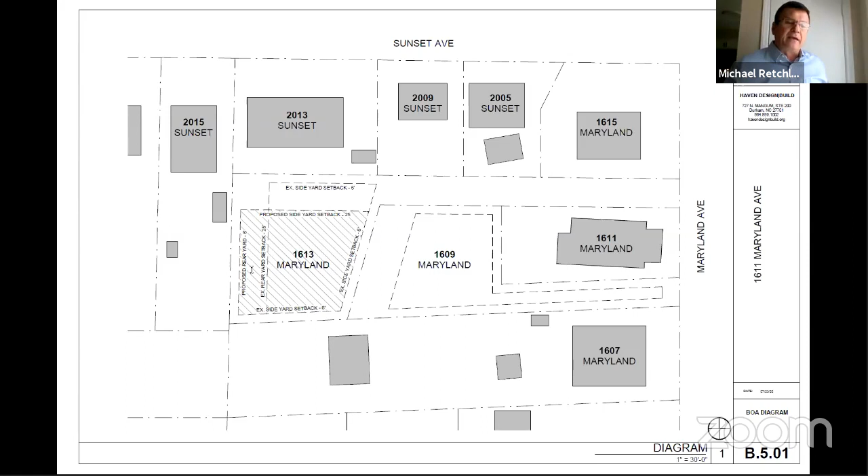Okay, and that's on the bottom of the 1613 Maryland. That is this here. So this is the rear yard setback. Right. Okay. So the orientation aside, it will still always be the rear, which is why they're requesting that variance. Yep, I understand now. Thank you. You're welcome. All right, any other questions for Eliza? All right, Mr. Fields, we'll turn it over to you.

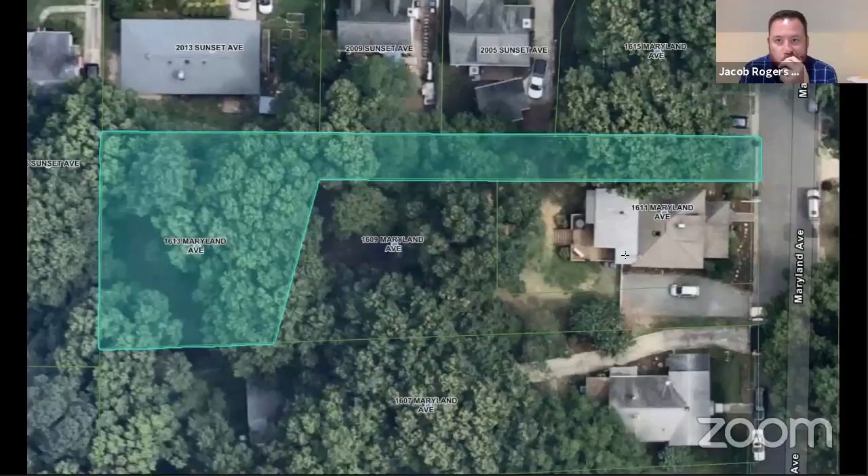Thank you. Good morning. I think our request is perhaps more restrictive than the staff recommendation may be. If we could go back to the diagram, Eliza. Yes, that right there. This one, okay. The goal that we have is to change the buildable area from what's provided by the current ordinance, which is with an existing side yard setback of 6 feet and an existing rear yard setback of 25 feet. What we're proposing to do is to change the buildable area so there's a proposed rear yard setback of 6 feet and an increased side yard setback of 25 feet.

And the purpose of that is to align the buildable area with the existing structures that have already been built on Sunset Avenue, and to provide adequate spacing between the structure that has already been built on 2013, which is a non-conforming structure that does not have a rear yard setback of 25 feet. So reducing the rear yard setback of 1613 to 6 feet will line that setback up with the setback that currently exists for 2013 on Sunset, so that 2015 Sunset enjoys the same setback that it currently has for 2013 for the entire length of its property. So nothing will be built or could be built any closer than what can currently be built on 2013. And the plan would be that we would not be any closer to that lot line than 2013 is.

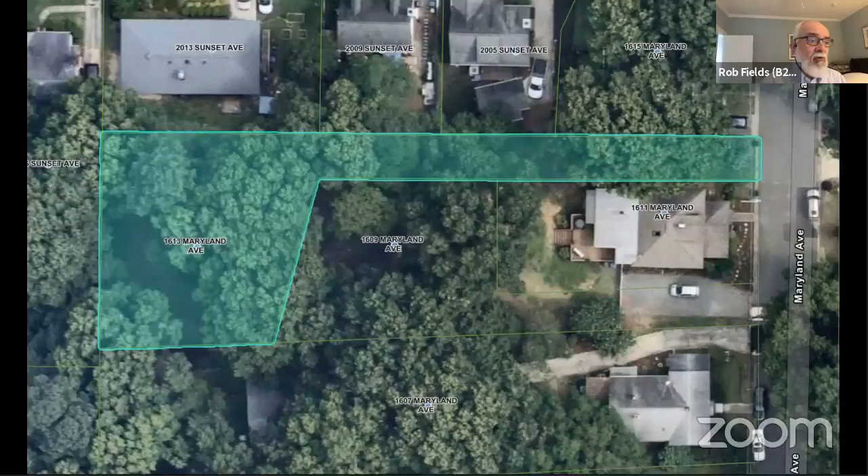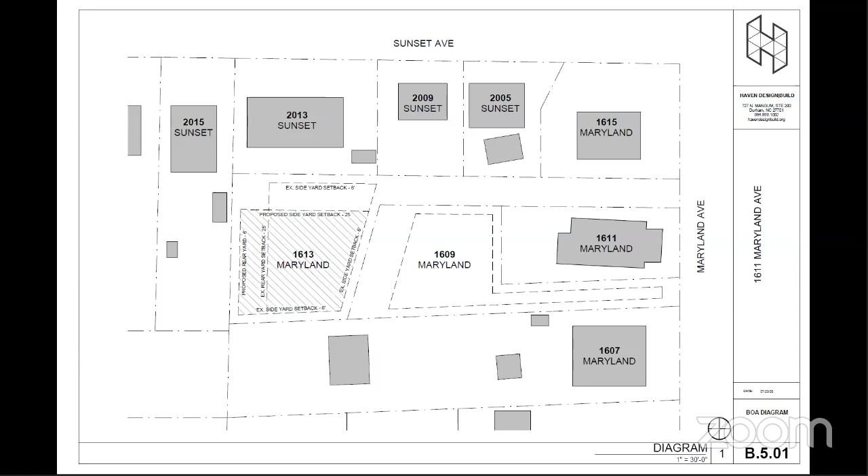And if a builder was going to put a structure in the current buildable area, the logical place to put a garage would be to have the driveway go directly into a garage shortly after you hit the flag part of the flag lot, and to build that garage within 6 feet of 2013 Sunset. That would be the way to maximize your use of the buildable area, to put the structure right there, put living space over top of that structure right there, and that would create a significant hardship for that.

So what we're trying to do is to eliminate that possibility and to require that the construction occurs to the south side of the lot rather than to the north side of the lot. So that's how we're addressing the hardship, and that's what the hardship is. Actually, it seems like you are trying to reduce the hardship for the neighbors rather than yourself. Absolutely. Just trying to reposition the buildable lot. I mean, actually, if we walk away from this and not approve it, say they build it, 2013 Sunset's going to be pissed.

Well, I think I'm fine either way, honestly, when I look at this, but I think that if we're looking at what the neighbors consider, I actually appreciate very much Mr. Fields talking with this neighbor and trying to figure out what's a good solution for what he is trying to do here. It's admirable. Those are my thoughts. Mr. Fields, did I interrupt you?

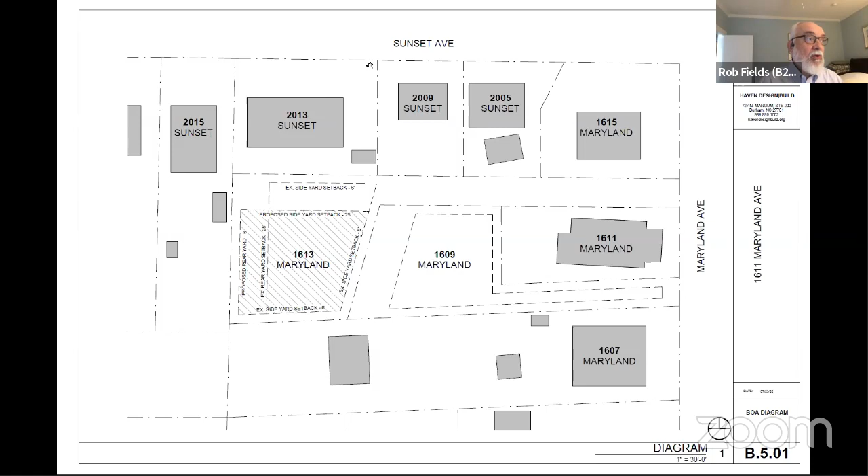I want to make sure here that we don't forget Ms. DeLacy. She did have a question. I'm sorry, Regina. That's okay, honey.

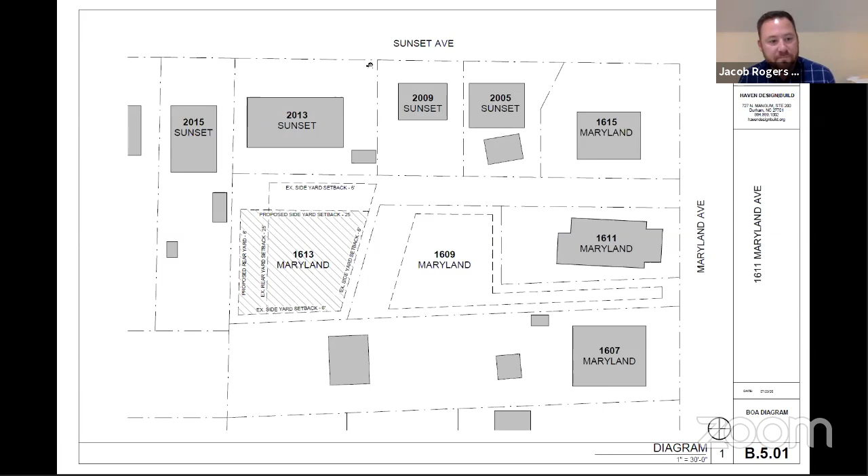I think we're clashing between our charge to take care of the Unified Development Ordinance, and we are also charged to see that substantial justice is achieved. If you want to be putting a house so that you could salt your neighbor's soup, that would be a strict application of the ordinance. However, with substantial justice, I don't think it should just be for the applicant, but this shows he has the intent to see substantial justice is served, and I'm going to vote for it. Regina, you said it much more eloquently than I could. Very well done. I agree completely.

But Regina, don't you think, there's a driveway coming up, and how do we know there's not going to be a parking lot there with cars? In that adjustment, that would be part of the building approval process. It's enforcement.

And we have a maximum amount of buildable area per lot, do we not, staff? Eliza Monroe, staff speaking here. There is that in relation to some of these drainage concerns and things of that sort. There are maximum amount of buildable area, as well as there is buildable area in which they're permitted to be in. So they could not go over a certain amount of impervious surface per lot. Surface. That's what I was thinking. Yes. Retchless. Yeah, this is really an unusual variance because of the flag lot created.